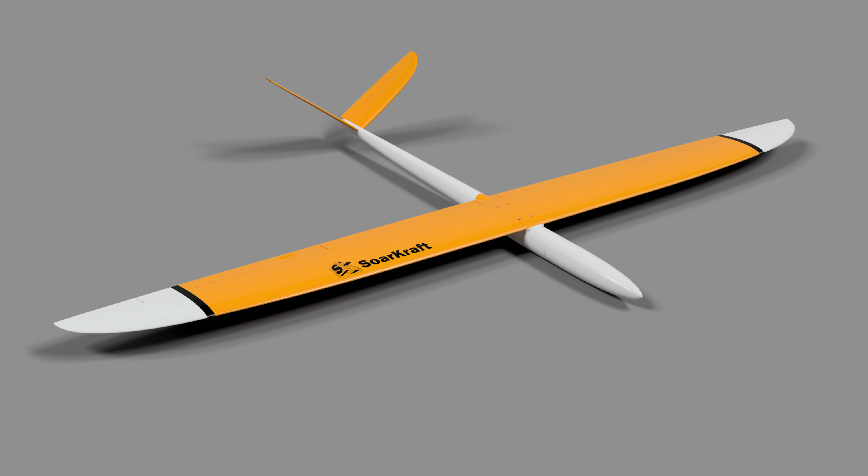This video is about building this, the Stretch, a 3D printed 1.6 meter V-tail glider.

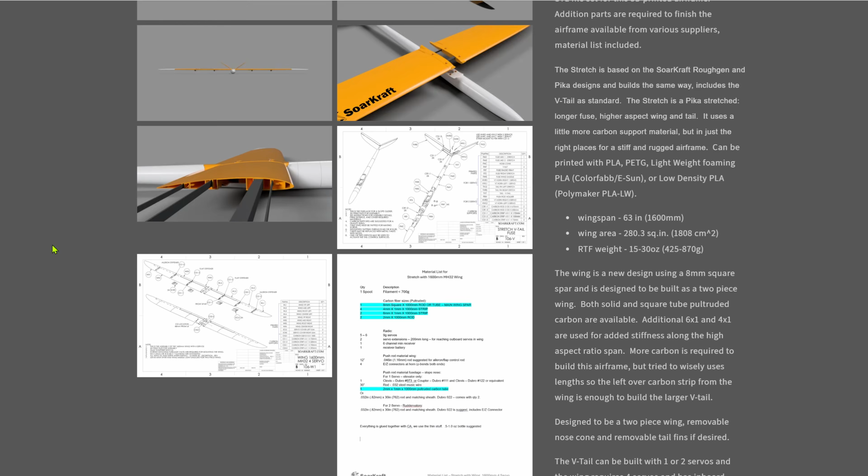We're going to print, build, and fly the Stretch.

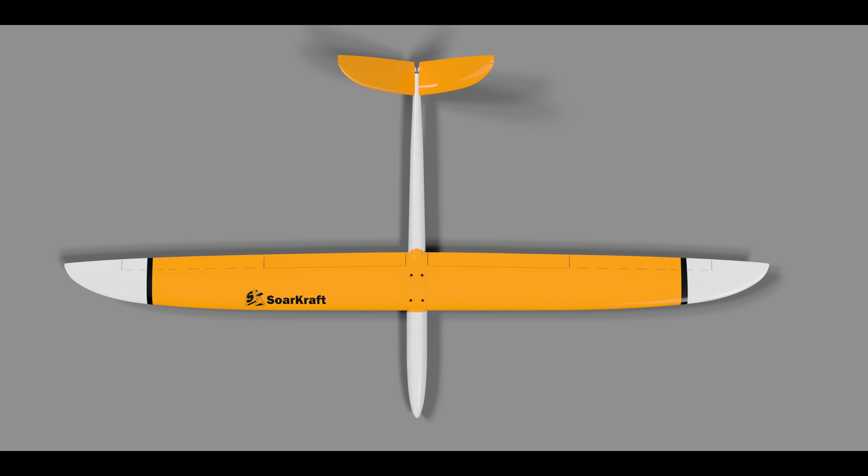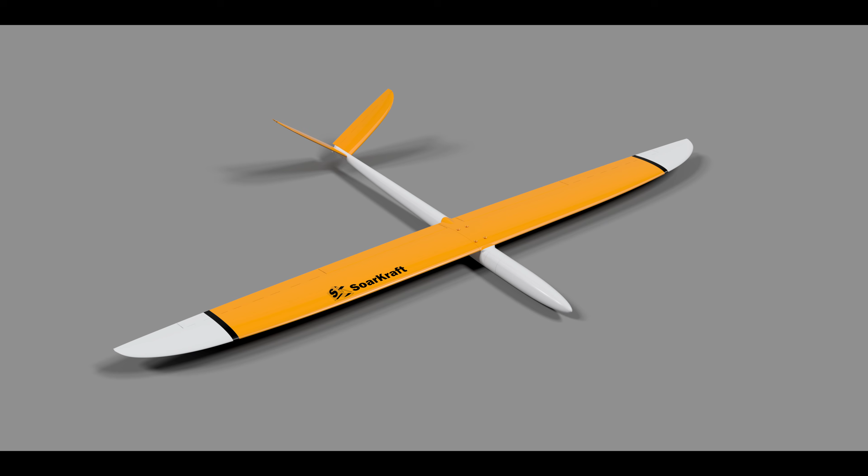The ready-to-fly weight is lightest for foaming lightweight PLA and heaviest for regular PLA, solid spar, and all metal gear servos. And this will be a heavy slope build in PLA Plus for windy conditions, but they all pretty much build the same. The Stretch flies great out of PLA and it carries the extra weight easily. The stiffer material makes for very crisp response, and it flies like a molded glider.

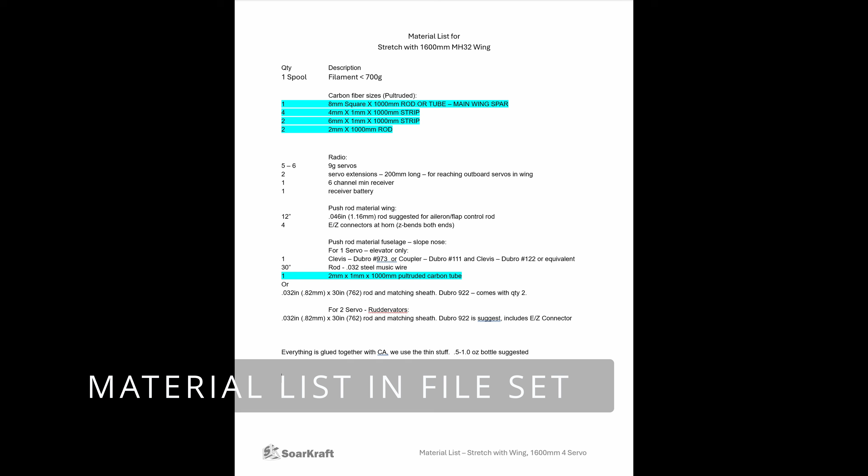The new 1.6 meter wing uses an 8mm carbon spar as well as other carbon reinforcements to make a strong and stiff two-piece wing. The 8mm square carbon spar is available in lightweight square tube or very stiff solid square rod. I will include these sources in the description below, but you too can look for a local supplier by Googling Pultruded Carbon 1000 and look through the results.

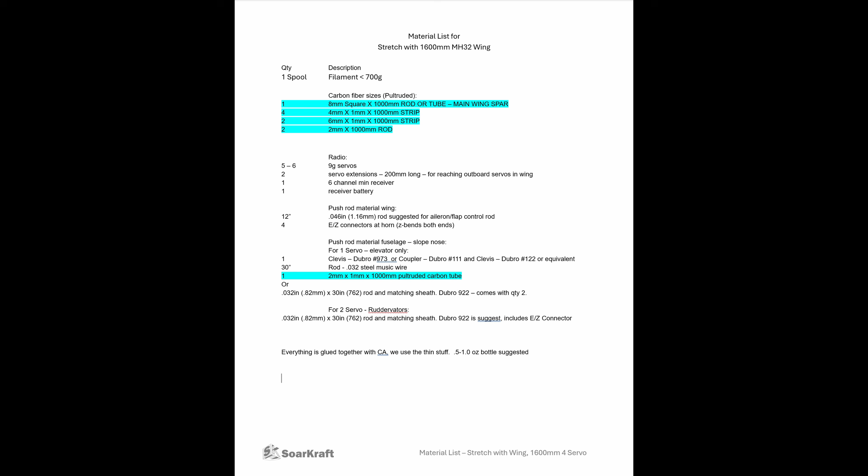Shipping the meter-long carbon is usually the hassle, so getting all the carbon at once from the same supplier helps. The rest of the gear is pretty standard RC stuff. Lastly, the SoarKraft parts can be printed with any type of material, so then it's deciding which one.

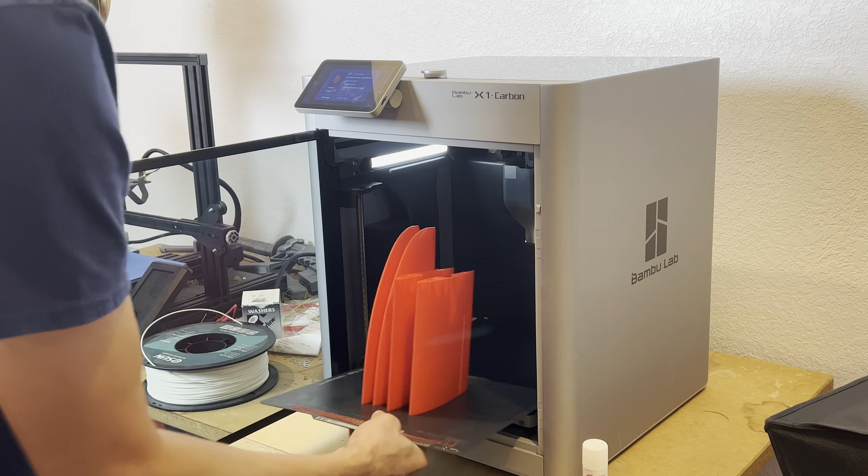For this build, I've printed all of these parts out of PLA Plus, using PrusaSlicer and the SoarKraft configuration files for PLA with the nozzle temperature increased to 220 for PLA Plus. If you are using a Bambu X1C or P1S, find the PLA configuration in the file set or on the website. These are .json file type, and you need both filament and process.

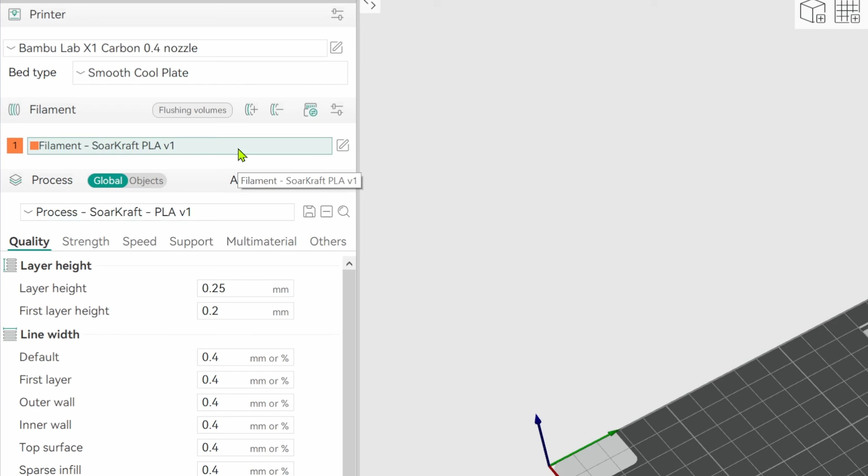Import them, and they will show up in the user presets for filament and process. Select the SoarKraft process and the SoarKraft filament user presets, and make the nozzle temperature change for PLA Plus. Slice and look at the nozzle path for any given layer. If you see it extrude the entire airfoil skin first, then the interior structure second, then you know you are using the right process configuration.

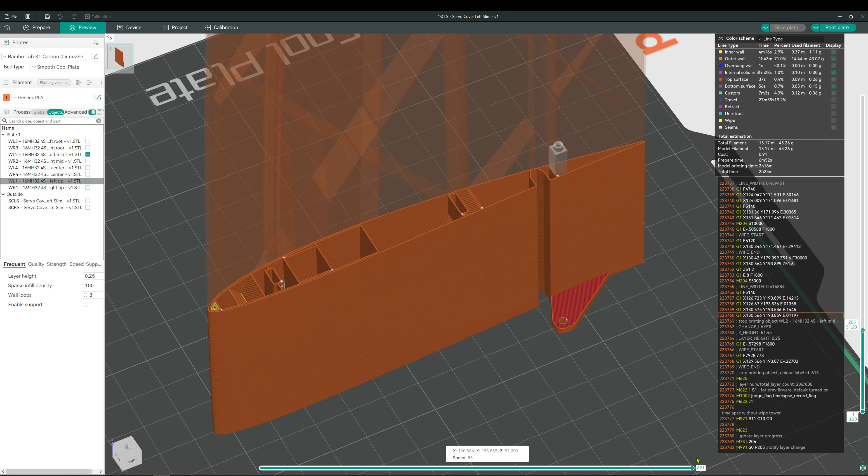Bambu Studio works exactly the same way, with exactly the same configuration files, to slice the same way. Even if you're not using a Bambu printer, you can use OrcaSlicer and these settings for just about any printer to get good results with these SoarKraft parts. See my other video for how to transfer settings. I do strongly suggest printing the test part first to dial in all the settings before printing multiple wing panels.

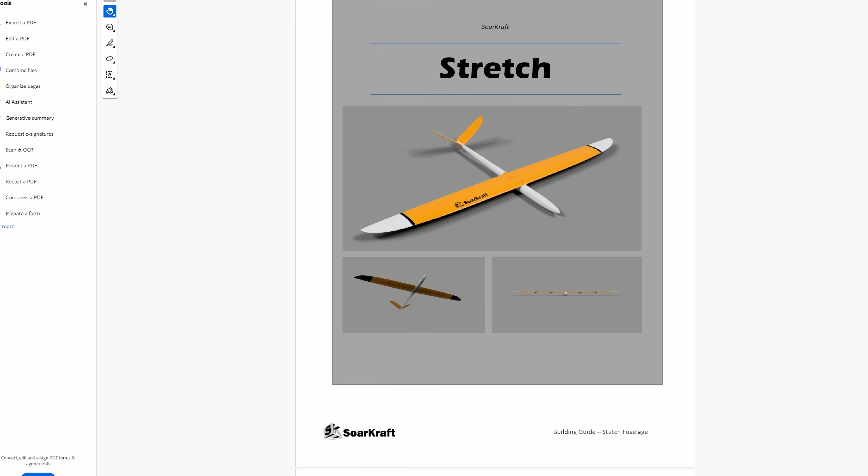I used Creality Hyper PLA Orange and Overture PLA Pro White, which is opaque and paints well. There are separate instructions for the fuselage and the wing, but each contain a list of every part that needs to be printed, as well as diagrams for where all the parts go.

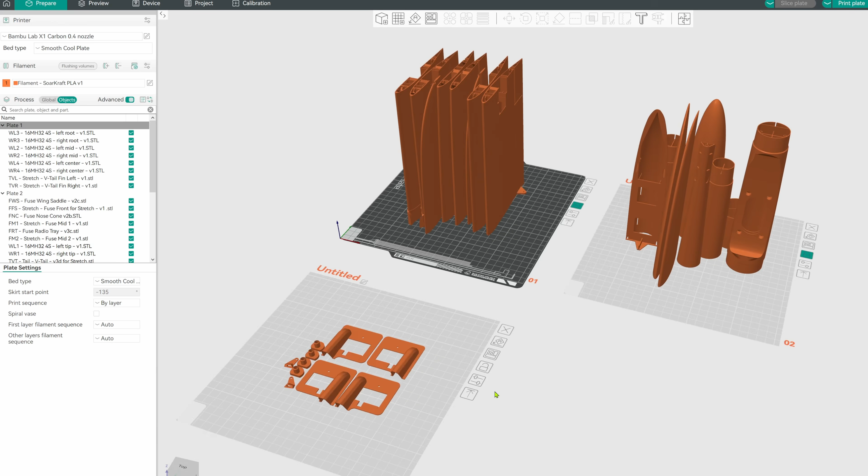I can load all the parts into one project for this Stretch airplane. And because I am printing in PLA Plus, I can print multiple parts at a time. And in this project, I have it all set up by color. The majority of the wing in orange and all the other parts in white.

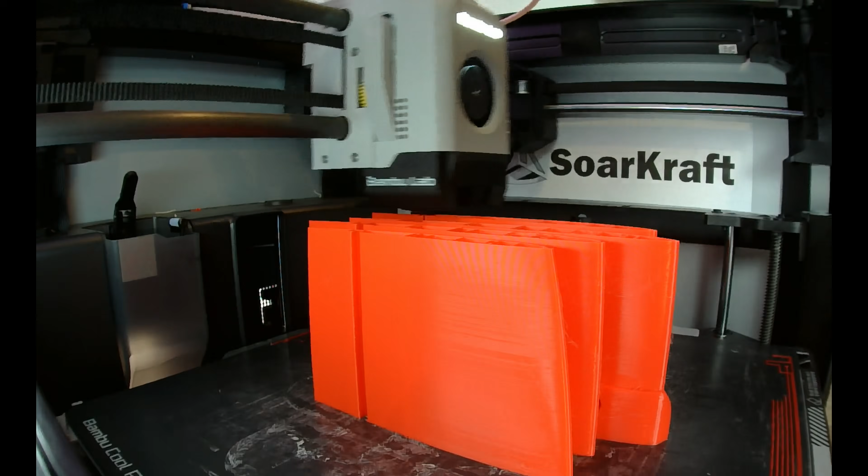The whole plane takes only 22.5 hours to print, and that's not even using the fastest print settings. With only 3 setups, the printer does all the work, with a little interaction to pull parts, change colors, and prep the print bed to go again. Yes, it's that easy. With all the parts printed and the Pultruded Carbon in hand, I can start building.

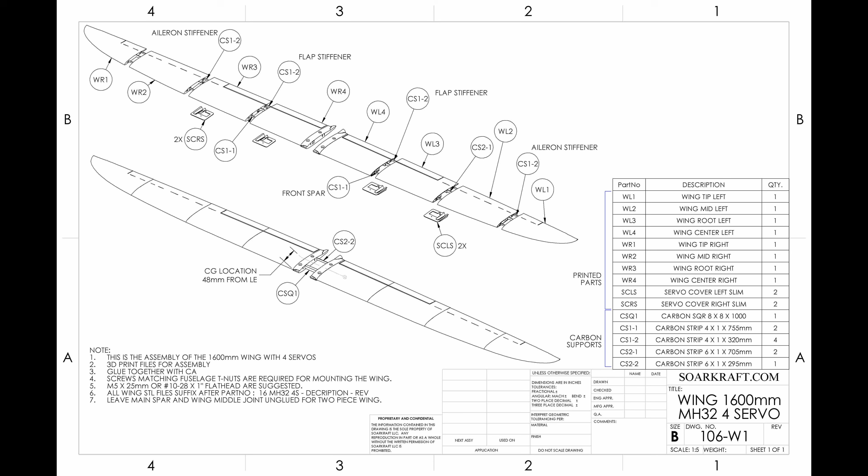Here are all the parts for building the wing. There's a wing diagram that shows where everything goes, as well as step-by-step instructions. The carbon fiber strips need to be cut to length. I use a white paint pen to mark them per the instructions, and cut them with a small bandsaw and a metal cutting blade. It only takes seconds, but you can use whatever process you want.

Carbon dust is dangerous, so protect yourself. The leftover carbon strips from the wing will be used to build the tail, so save those pieces. I add paint before assembly, easier to mask. This is just a flat black, couple coats.

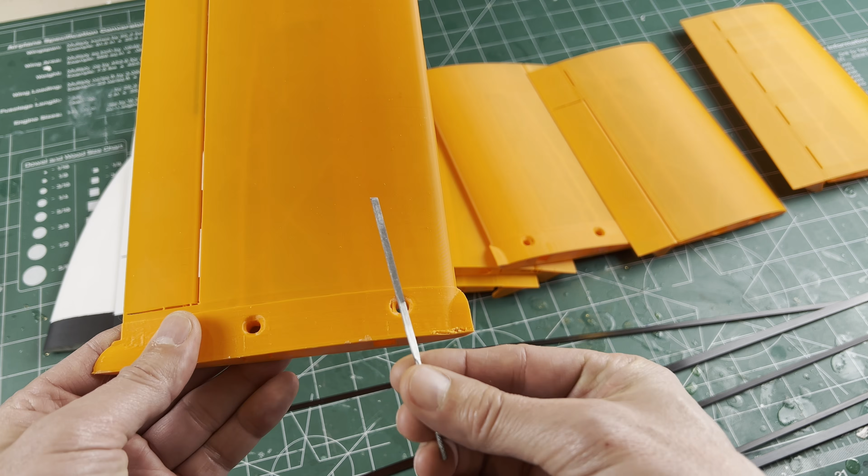These 4-inch files are great for clearing any issues with the carbon channels. The PLA prints so clean most parts don't need any touch-up. But this is 3D printing, so every once in a while there's a goober where you don't want it. This round file works well for the spar channel. You can even work the carbon back and forth to loosen up the channel.

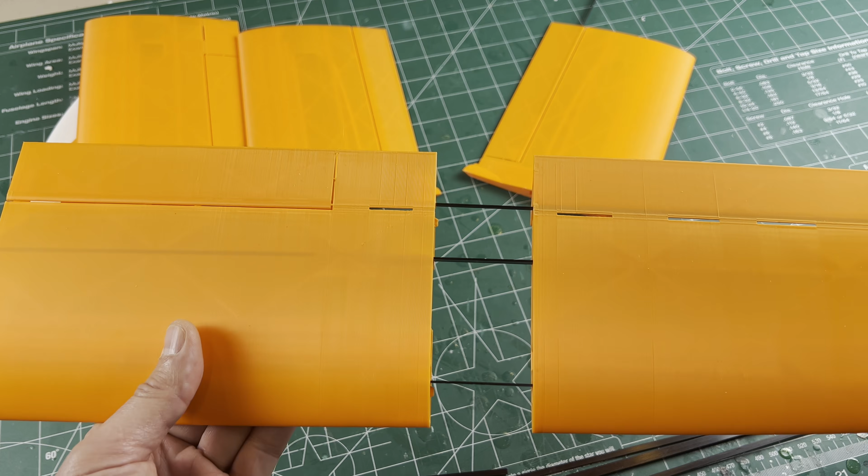Test fit all of the carbon to the wing panels. Work one side at a time. File and sand as necessary. The panels should fit nicely together. Slight gaps are okay. Make sure the carbon is below the surface at the center on both sides. Adjust if necessary. Fit the main square spar and the rear center spar, and test fit the 2 sides together.

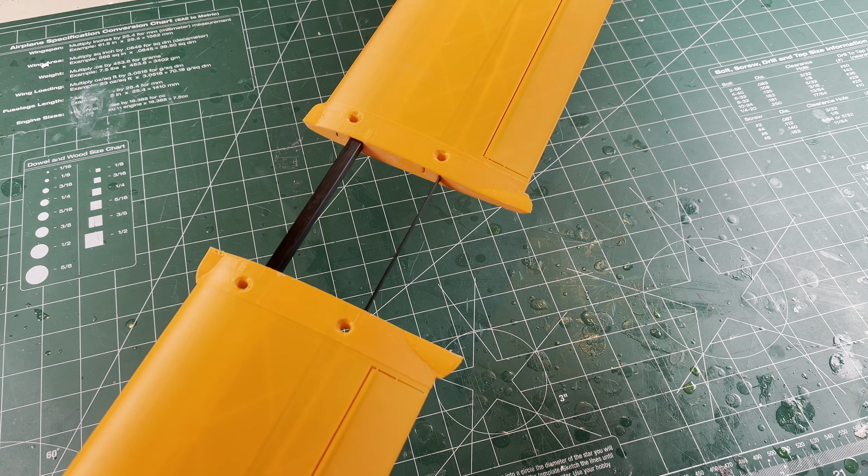Check the fit and finish of all the joints and all the carbon, and if it's to your liking, you're ready to move on. Separate the halves and get ready for glue. Make a gap between the tip and the mid panel so you can access the carbon. And make sure the aileron carbon is in the right place and the other 2 strips are bottomed out.

We're going to use thin CA to glue these in, and 3 binder clips to hold the trailing edge between panels. Standing on the tip, drip the thin CA down each carbon strip. A couple of drops each is all it needs. This will anchor the carbon strips in the tip, making the rest of the assembly easy. Then slide the mid panel down in place. Clean up any drips with a paper towel and clip the trailing edge. And make sure the leading edge is aligned and the panel seam is tight by pushing down.

Repeat for the next panel. You can use the square main carbon spar for alignment, but don't glue it in place. If you're at all worried about it, you can remove it. Remove the square spar and glue the center panel carbon. Then set it aside and let it dry while you glue the other side.

Exactly the same method for the other side. Glue, slide, clip. Remember, no glue on the main spar. And if you do end up with a larger gap between panels than you like, don't worry about it. You can fill it in later with a little bit of epoxy. I then stand the wing halves on the tips to dry.

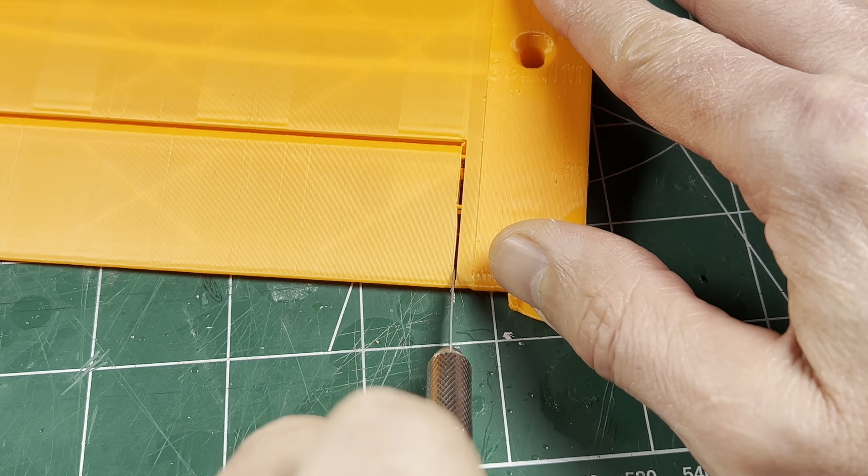Use a sharp knife to free up the ends of the control surfaces. A razor saw works too. With the ends free, grab the middle of the flap and just start bending it back and forth to get the hinge line to form. Repeat this until you get about 90 degrees down and 30 degrees up. Use a knife or a file to clean up any interferences with the seam cover to get a full 30 degrees up. For the aileron hinge, score the bottom with a file and bend it back and forth until it moves freely.

Then with some silicone and a paper towel, we're going to coat the top and bottom of the hinge line. Wipe off the excess. You can use a Q-tip if your finger doesn't fit. Just a light thin coat on both sides, and it seals the gap nicely. Do this for all 4 control surfaces on the wing. Glue, wipe. With a new clean paper towel, you can clean up any excess on the hinge line.

Let the silicone dry for about a half hour to an hour to skin over. Then exercise the hinges to make sure they move nicely. Clean up any globs that might be getting in the way. And now the wings are finished and ready for radio gear, and I can let them dry while I build the fuselage.

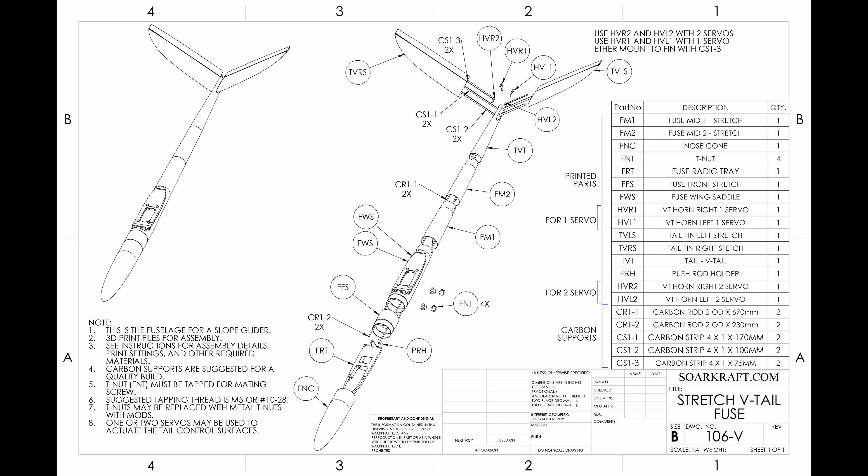Here are all the fuselage parts, including the leftover carbon from the wing. The 4x1 strips will be used for the tail fins. There is a part diagram and building instructions for the fuselage with a parts list.

Some of the stretch parts are common with the other models, but to add length to the tail boom, the midsection was lengthened and split into 2 parts, but the same basic design. Same wing saddle, and an extender was added in front of the wing. Same tail section, and the same radio tray and nose cone, and the tail fins have been lengthened.

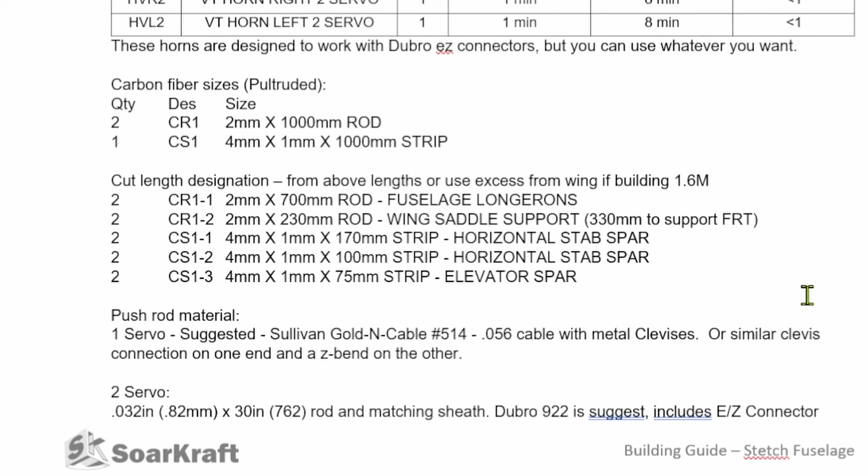So let's start by cutting all the carbon to length and test fit everything together. Seams should fit tightly together, sand and file as necessary. I'm going to use the plastic T-nuts. Don't forget to thread them before you install them. You can use metal T-nuts if you want, but they do need to be modified.

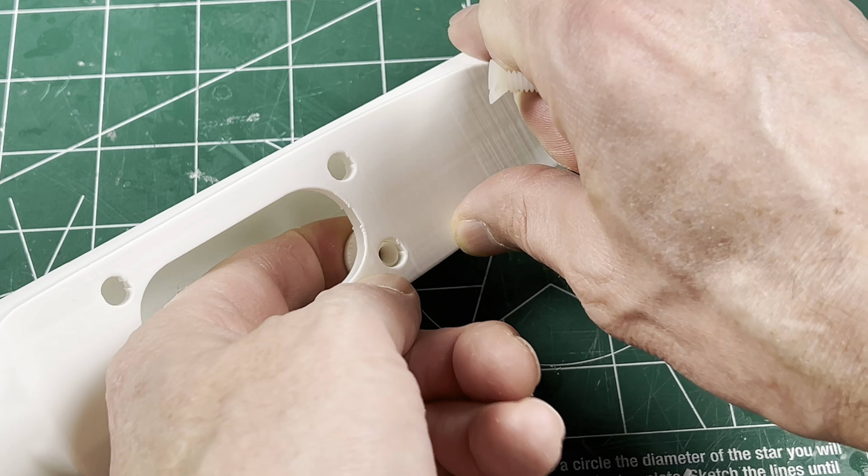Plastic or metal wing bolts. I'm going to use plastic. Pop the T-nuts into the wing saddle. You can use one of the wing bolts to pull them into place if you need to. All 4 installed. Now that everything is test fit the way you like, we can start gluing. Let's build the tail fins first.

The front 2 carbon strips should stick out about 16 millimeters, and the control horn carbon should stick out about 5 millimeters. With the leading edge down, you can tack the carbon in place without it moving. Then stand it on end and add more. Repeat for the other side.

Score the bottom of the hinge line with a file. Then flex it back and forth. File more if you need to. Do the other side. Make it move nicely, but don't break it off.

Then silicone again and a clean paper towel. Thin layer of silicone on both sides. Wipe off the excess, top and bottom, just like the ailerons and flaps. Clean paper towel to clean up any excess. Set aside to dry for an hour, then flex it to check it out. Fix any problems. The fins are done, so let's get back to the fuselage.